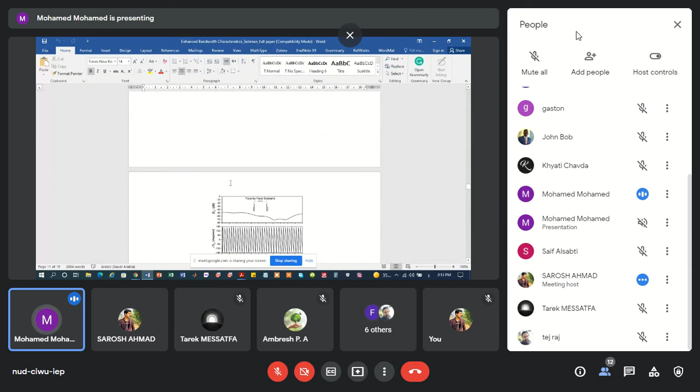And also I investigated more about the time domain because I am interested in the time domain. This is experimental work compared with the simulation result in the time domain, because it's part of the S parameter measurement, as a magnitude and as a phase. You can see the linearity of the phase. Also, I investigated the signal itself. I could estimate the group delay.

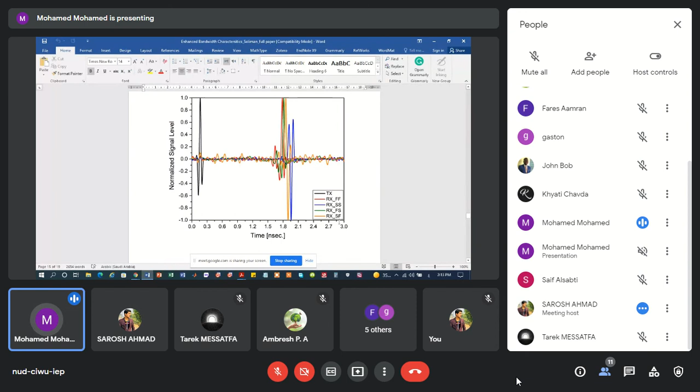After that, I measured the signal, also all by simulation, with transmitting and receiving antennas in different scenarios, face to face, side to face. It's 4 scenarios, as everybody knows. And after that, I investigated the normalized power spectral density because I want to mask it with the normal power spectral density for ultra wideband. And we can see it covers all the range of ultra wideband, till maybe 21 or 21.5.

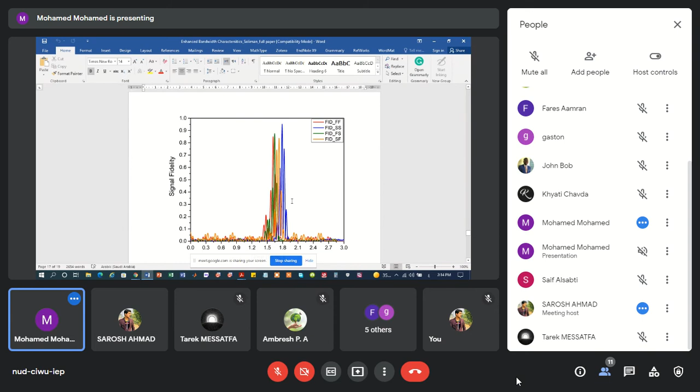And also I estimated the signal fidelity. The signal fidelity, as you can see, is high in the scenarios, almost all of them more than maybe 85, in all cases. This is one of our considered complete papers after the EUCAP conference. It was in London, 2018.

Did you publish this paper? This one we didn't publish, actually, because we faced a difficulty. EUCAP suggested us to submit it to the IET. When we started writing the paper, we found most of the data is already written in the conference paper. We faced a very big difficulty about plagiarism. This was one issue, even though we have new results. I quit working on it maybe 1 year ago, because of this reason.

Another thing, in the second year, of course, we have difficulty with the measurement and fabrication. This fabrication and measurement takes from me almost 3 to 5 months. Fabrication, yes, measurements do not take much time, but here it is very fast. For that we started working on another thing.

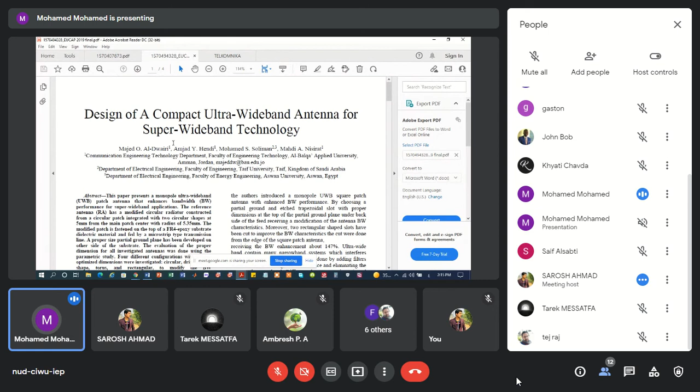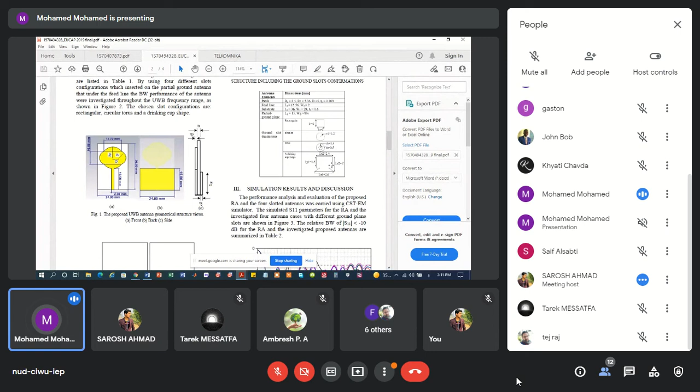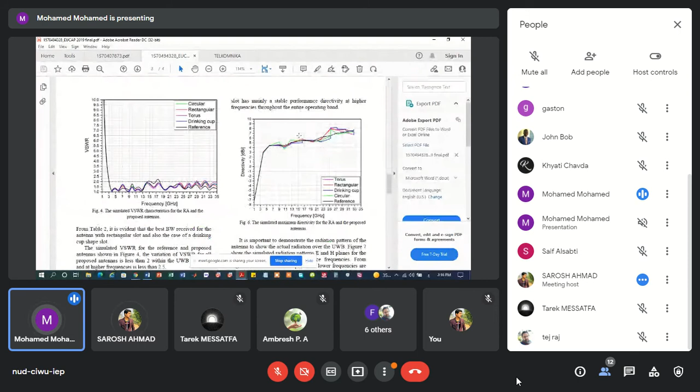Me and my colleague were thinking to modify the antenna shape, so we can have our own shape. For that, we submitted a paper to EUCAP the second year after that, and alhamdulillah, this paper was also accepted and presented. We have our own shape, and we cut the slot behind the feed in different scenarios, as you see, and we could get till maybe 35 gigahertz. We also investigated the directivity, the gain, and the radiation pattern.

But also the facility of the measurement and fabrication was difficult for us at this time. The year after that, maybe 2 years ago, we decided to end working on ultra-wideband, because we also published a paper in the same year in Springer, in Wireless Personal Communications. It was a good paper. Alhamdulillah, it took a long time for publication, submitting and revision.

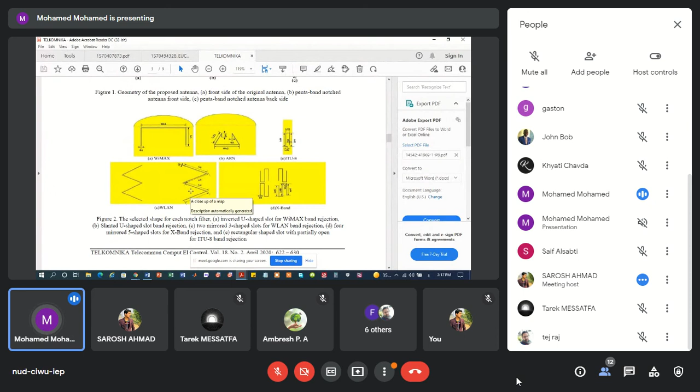For that, we tried to submit a paper to Telkomnika, this Scopus Indonesian journal. We tried to investigate another type of ultra-wideband antenna, and we tried to make some notches. Because we saw some people make maybe 3 or 4 notches, in this paper we made 5 notches. As you see, this is our own design.

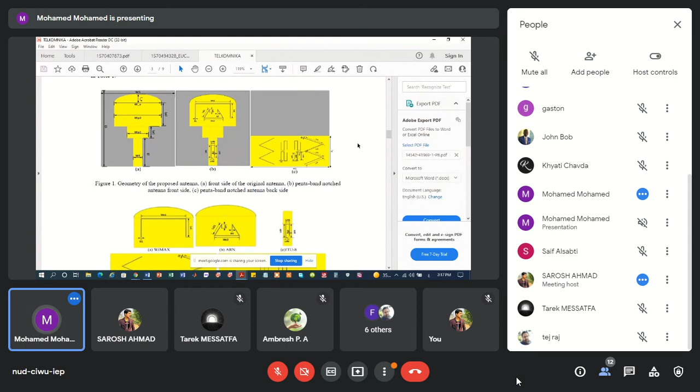Actually, we have a strategy in our design, and I totally agree with this strategy. If you design a simple shape with a small modification, you can control the optimization easily. This is one of our targets. Actually, it took us almost 3 weeks to optimize all these parameters, and all these routes in the partial ground.

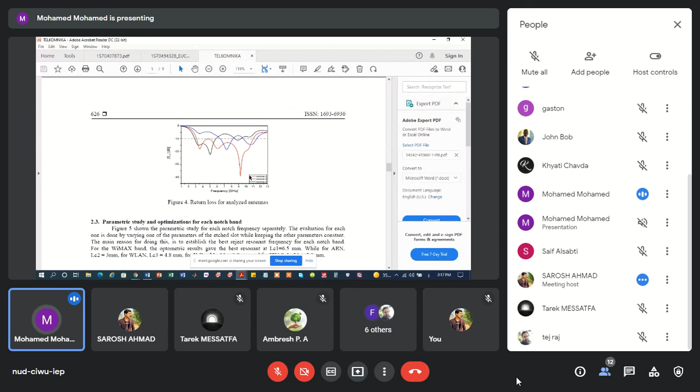We tried to use the equation, and also optimization, and we made a comparison of both of them. This is the evolution of the antenna design: the first design, second design, and the final design. These are the steps of the optimization for each one, and we could get this kind of 5 notches, as you see. Alhamdulillah, this was accepted in less than 1 month. In this paper we made a comparison with other work, and we concluded this in the discussion and the conclusion.

This is maybe considered our last work in ultra-wideband. But I started working on ultra-wideband again some months ago, and I made a design. The main purpose of this design is not ultra-wideband, it is for a MIMO antenna. I will show you the result, because I am still writing this paper, so I will show you only the result, not the shape of the antenna. And we can discuss if you have an idea.

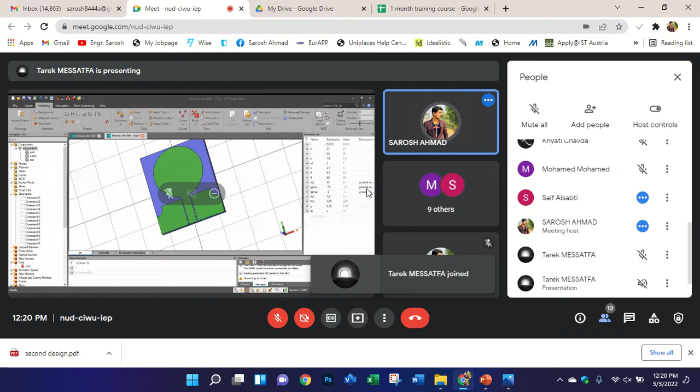Okay, Tarek, before presenting your screen, you should ask me, because maybe some other people want to present. What? I can't hear you. Wait a minute. Now you can hear me? Yes. I mean, before presenting your screen, you should ask whether you should present or not. I was asking Saif first, then I will ask you. Dear Saif, do you want to say anything?

Yes, I did a MIMO design. I will show it and some results. It starts from narrowband and ends with ultra-wideband. Okay, show me your screen. I will show.

It's sharing now. Not yet. I think the share button is not activated, I don't know why. Maybe it will take some time, as Mohamed did. Brother, you have a share screen button on the left side. You can push it and after that you can share. Yes, now it's okay. So, do you see my design now? I am watching your screen, not your design. You open the CST. Just a minute. I will share another option. Now sharing? Yes.

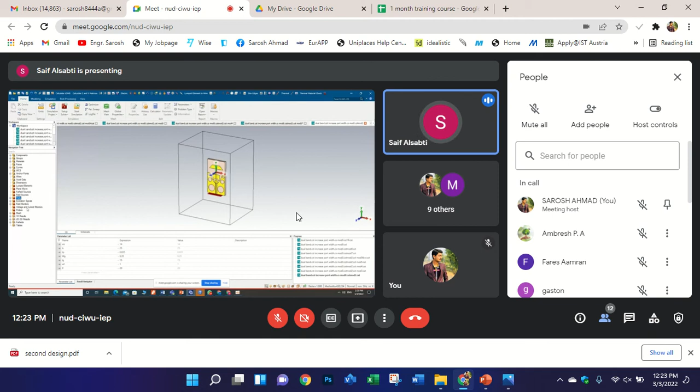I got multiple simulations for multiple designs. So I started with the first design, and I got this result here. So here is the wideband, as you see, but I need to shift the frequency. Maybe the component or the antenna can be scaled up to decrease the frequency, shifting it. This is the main idea.

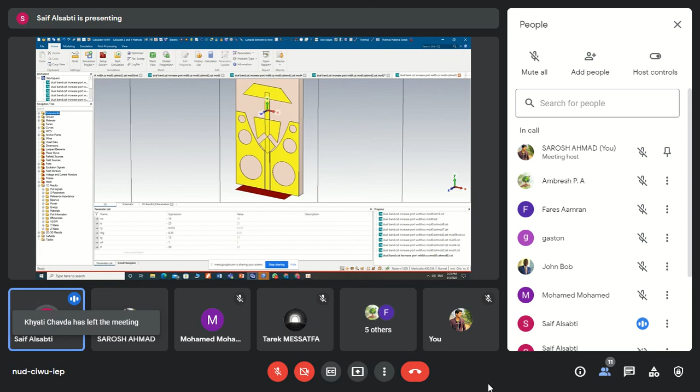And for this design, I will show this. I think yesterday you showed us the same design, right? Yes, but I modified something about it. I modified it by cutting here. If you see, I got a wider band. This is the first option, and with the second option I also get a wide band and increase it more by changing something.

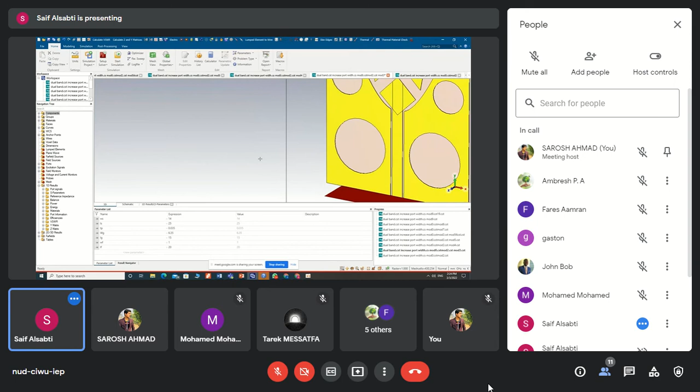I changed the size for that. Maybe it's very near, not a big difference. So another option, I put a hat here to see, and I got new results. So I get more wideband and a frequency shift, because if you remember, it started from 4, now it's 3.5. After that, I did another simulation here. Not much, but the band at 7 disappears.

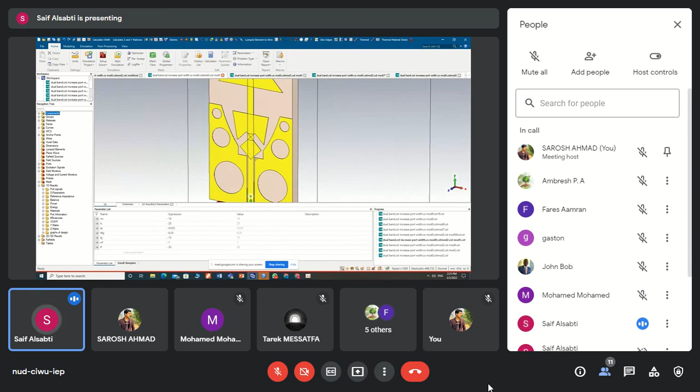I cut from here and this side to increase the band and shift. After studying the surface current, I cut it from there, and also made some change here to remove the upper part of the CPW. After that, I tried many times. And here I made some frequency shifting. I cut it from there and there, and got a new result.

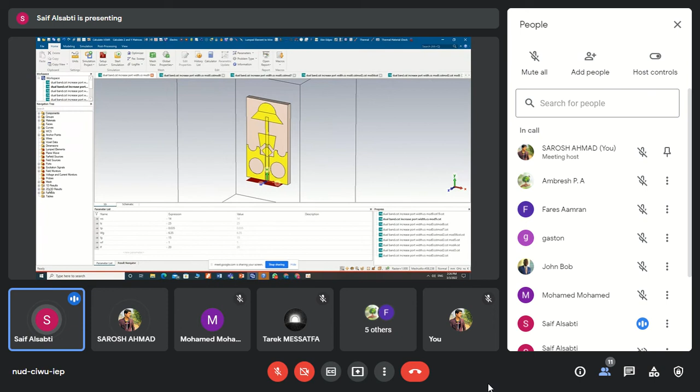So the total result, I want to see something here. This one. Yes, that one. Also, I cut the half circle here and got a new result. So I will see all the designs here. Which one is recommended to fix it and shift the frequency? So I got many results here and saved the graphs of the designs.

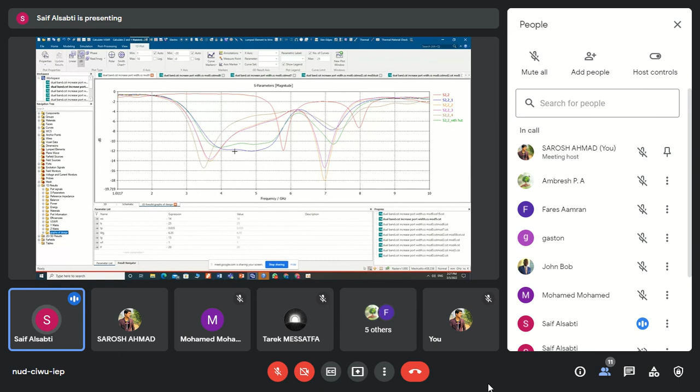Yes, if you look at both wideband results you have achieved, the return loss is not very good, because it should be less than minus 15 dB. In all of the cases, you have very low return loss. I mean it should be deeper, in the downward direction. Maybe up to 40 or more than 40. It should be in the range minus 25 to minus 40. It is okay.

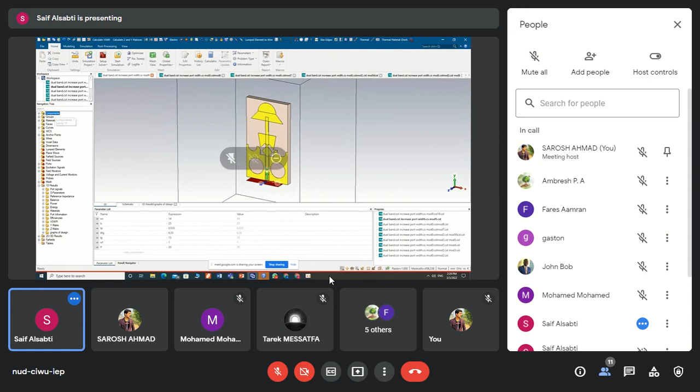Yes, maybe enhancement by using some enhancement surface material or metamaterial. Yes, we can try with metamaterial, but first you need to set the frequency. You can set the frequency at 3.5 gigahertz. Show me the design first. Which one? Maybe design 9 here. Yes, you can show any design. Press one button on your keyboard. Press 1. Yes.

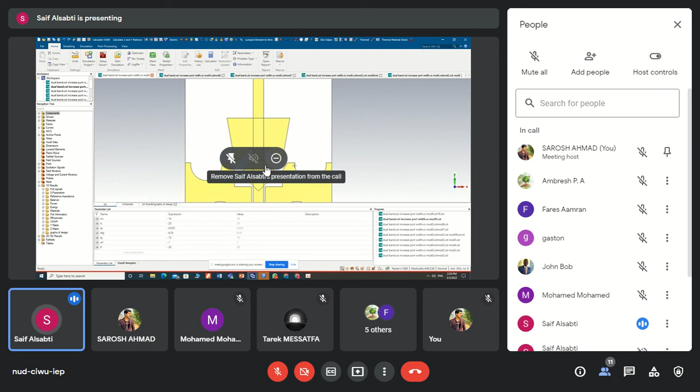Zoom it, and you should know the reason for your circular slots inside the CPW. You should notice the change. If there is no change in the frequency band, there is no need to add circular slots in the CPW. So I remove it, because it doesn't have a big effect on the antenna design. Okay, show me the first design with the complete CPW.

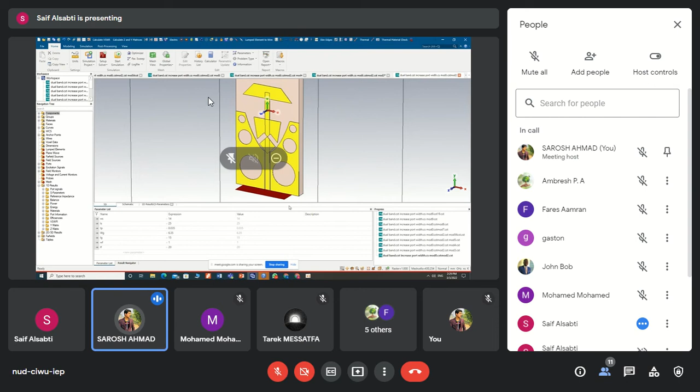I want to take a snip and share my screen. Just zoom it so that I can take a snip. And keep your design near the toolbar, on the left side. I mean, shift your design to the left side. Like this? It's okay. Let me share my screen, I want to share some suggestions with you. Can you see my screen? Just a minute. Yes, now it's okay.

So you have this design. First you need to know the difference in the results from adding these slots. If there is no change in the S11, then no need to add these slots. Yes, I will remove it because not a big change. Okay, I want to share more ideas, like you can modify your shape, because at this moment your design results are not very good. So you can do some steps to get better results. Wait a minute.

Okay, suppose you have this design. Okay, this one. And you have this shape, this is your patch. Okay, the other thing, this CPW, you can use CPW in this way. You can make a sharp peak, like this, and then go to this like this. Okay, so this is your CPW. And also in the same way, this is your CPW.

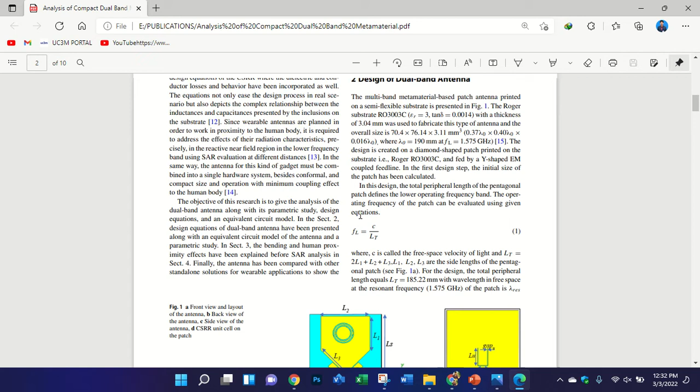Okay, now this is your feed line. What if you divide your feed line into two parts to achieve the novelty aspects? If you divide your feed line into two parts, one is here, like a Y shape. As I showed you in one of my papers, or maybe I will show again, this one is the same as this one. You can see the feed line is a Y shape feed line. So you can make a Y shape feed line.

But you need to connect a patch in that way. Remove this one, this patch. Okay, so you have a... you can make any shape here, like Z shape or S shape. You will get a dual band antenna. Okay, this is your first resonator. Or it can be like this.

So here it increases the length, increases the wavelength to reduce the shifting frequency, right? Yes, you can make a resonator like this. I think so. Also, I used the feed line here. The total feed line I think is 25, maybe not 30. So this is the reason for the high frequency. Not very high frequency, but acceptable.

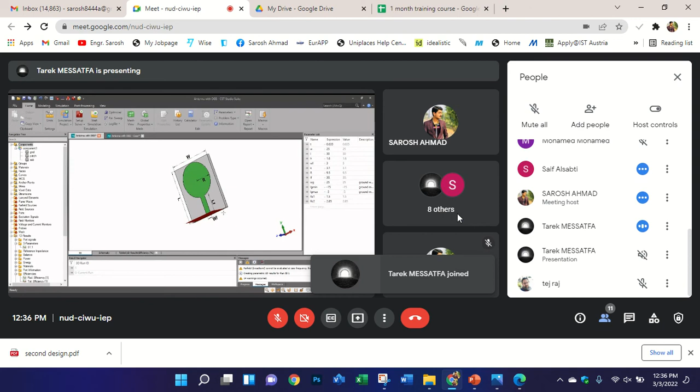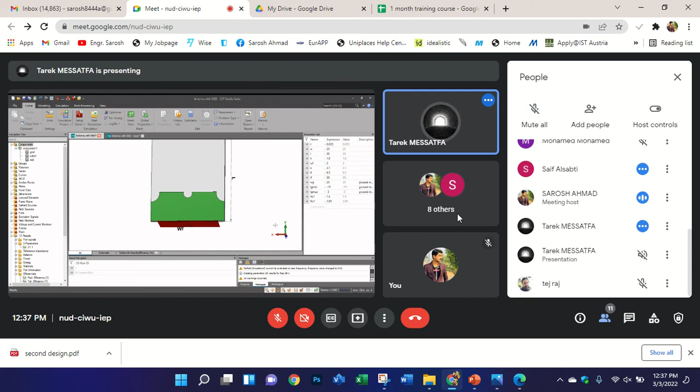Okay. At first, I made this design. I made circular shapes as a patch, and then I made a partial ground, and then I made a semicircle here behind the feed line. And I saw the result. I got some band above minus 10 dB. So I made quarter circles here at the edges of the ground, and I optimized the result, and I got a perfect result. You can see my S11. Yes, I can see your S11.

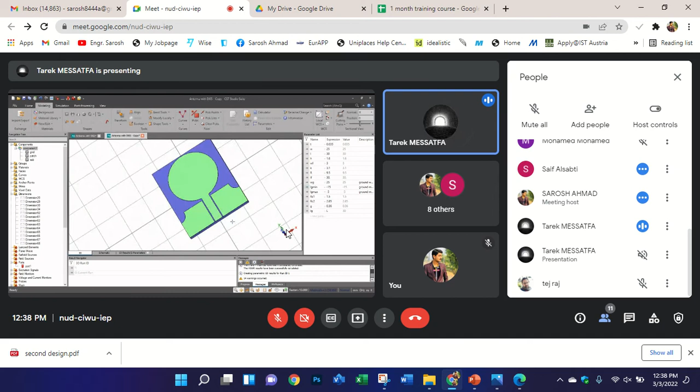But the problem is that there are a lot of circular patch antennas already published in the research. So we need to find the novelty factor, a new shape or new design. Yes, but this work is actually from 4 years ago, in my master's degree. Okay. And yesterday I tried to make this ground a coplanar waveguide and see the result. I get from 2.77 to 17 gigahertz. Yes, this is UWB, because it behaves like a UWB antenna.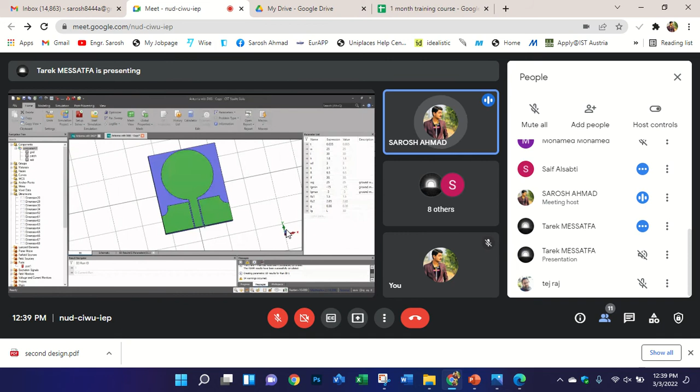But there is no shape, I mean, no good shape. Let me share my screen. I will give you some suggestions. Did I give you any suggestion on the previous designs you showed me? No, actually I didn't, because I was busy yesterday. Okay. I mean, I have given you. Yes.

Okay, Mr. Ahmad. Yes. For this work, what is the problem? We can't make optimizations or slots or any idea. Yes, I am going to share one of my designs that is circular, but you can see the design.

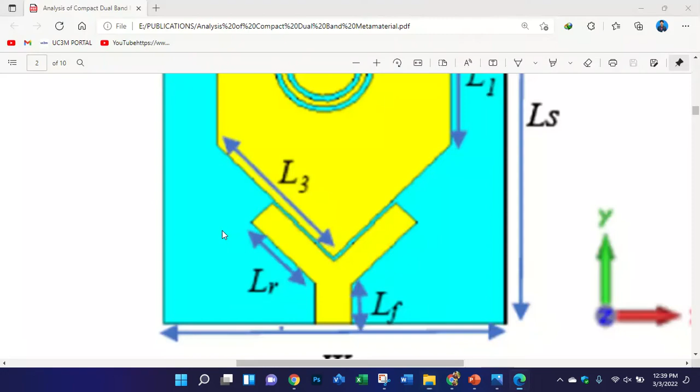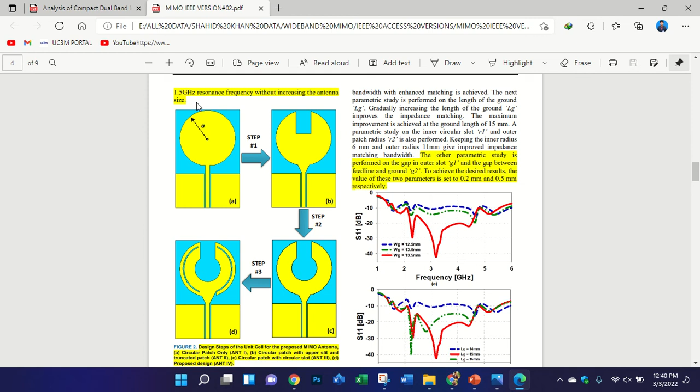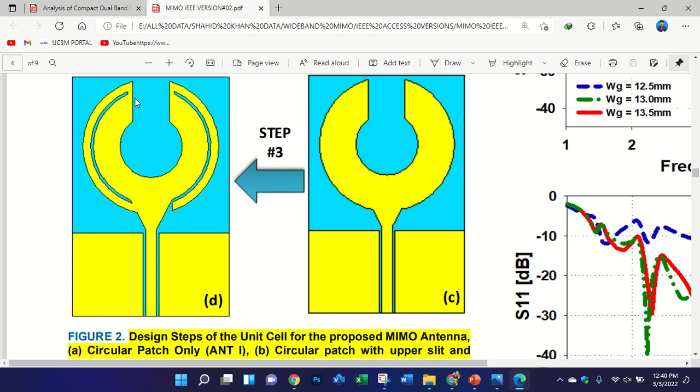Because this is a very simple design. You can see I made a simple one, I used this, this is already published. Then I made this slot, then I created this slot, and then made this final design, the left one. In this way you can modify the shape to achieve more bandwidth.

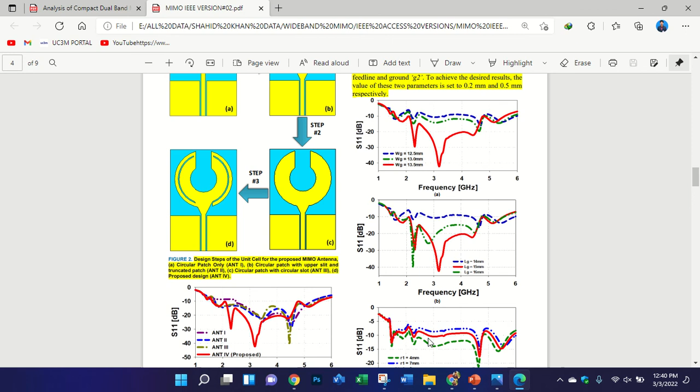It can be 2 to 5 gigahertz bandwidth, or it can be UWB, depends. So in this way you can make your patch different. Don't make a plain circular patch, just modify the shape so that nobody can say you have followed any paper and made the same thing. Because simple circular patch antennas are published a lot.

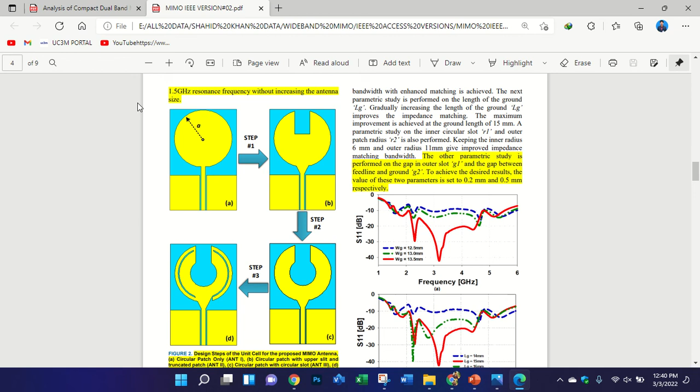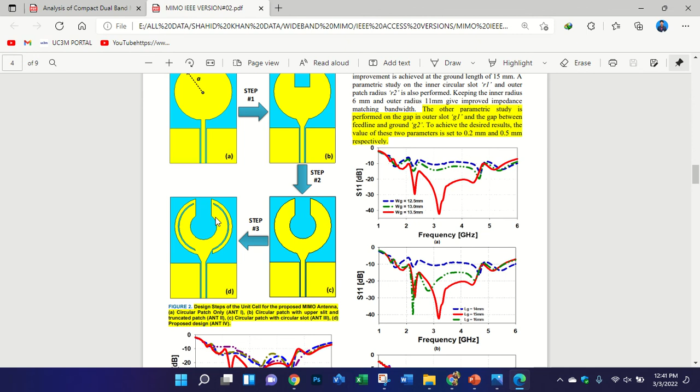So that's why I want you to make some changes in the CPW or make a different shape in the circular patch. Yes, actually I made a circular patch because it's my first design in CST. I didn't know many shapes. If you don't know any shape, you can even search the internet for different shapes. I didn't know shapes. Actually, I did circular shapes randomly.

Yes, it is random, but you can make slots. Suppose you have a substrate. This is your substrate and this is your patch, a circular patch, and you can make some slots or a different shape. First, in order to design, you need to keep in mind what you want to do. Like you have a simple patch like this.

So how can you modify the shape? What if you create a triangle in the middle of this patch, like this. But I think in this case I will not get super wideband. It's not necessary that you make a wideband, but the most important is the novelty factor, the frequency band you achieve, and how the results are.

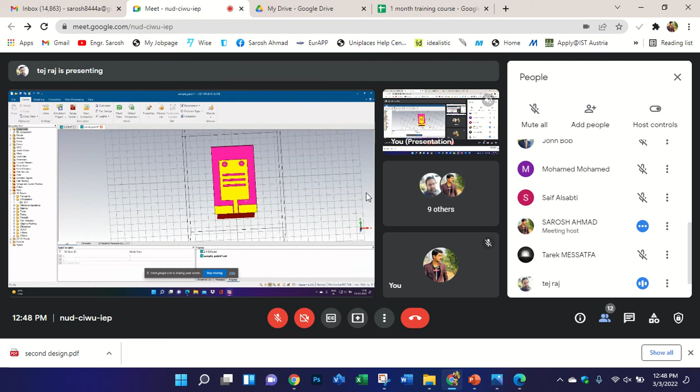Actually, you told me to go with the partial ground. I have designed the partial ground as well as this ring structure over here, but there is no effect on the S11 parameter. Then I again optimized this CPW ground plane according to its length, but still I am getting the same thing. It will be resonating after 7 gigahertz, I think.

I didn't get a proper result in this case. Okay, show me the impedance. Impedance will be 50 ohm. Okay, now show me the design. Yeah, this one, show me the back view. Is there anything on the back view?

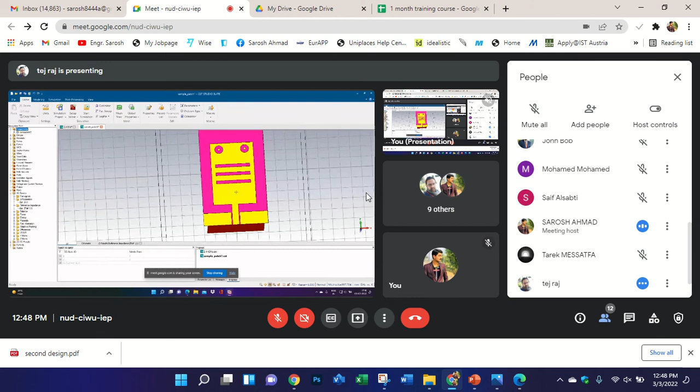First thing, why are you using two ground planes in the design? Actually, earlier I just did the partial ground and then checked the results, but still the same issue is there. Yes, you can use the partial ground, but not near the port.

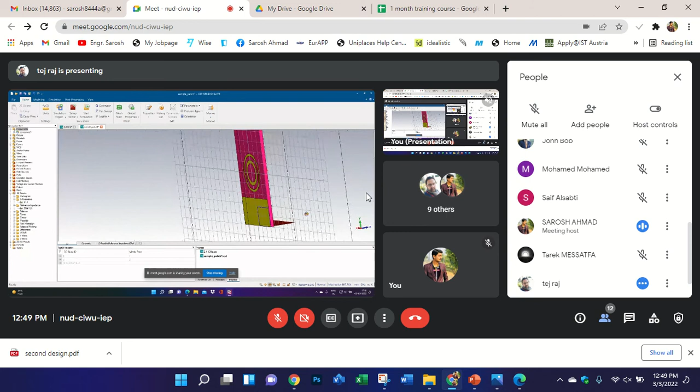You see, in the back view and in the front view you have the ground plane. It means on the front view you also have a ground, and on the back view you also have a ground. So if you want to make a defective ground on the other side of the substrate, then you don't need to make a ground near the port. You can make it upper side or mid side of the port. That's why it is not working properly.

Okay, you are using dual ground. What should I do to just shift the frequency band to lower frequencies? What can I do? Actually, I have also optimized the length of the patch from 27mm to 33, 34mm, but still getting the same thing, not a proper result actually.

Yes, when you use CPW, your CPW ground controls your frequency band, while your patch helps you achieve your desired radiation pattern. So in this case your frequency depends on the length of the CPW. If you increase or decrease the length of the ground, your frequency will vary. Also, you can try with less width of the feed line.

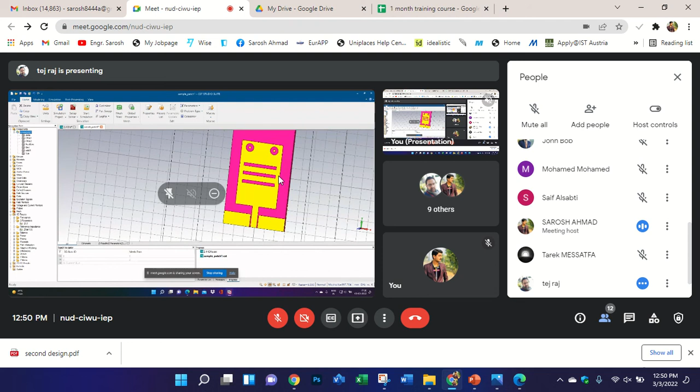Okay, that's good. Yes, and also try to make another new shape, because you can see this is a rectangular shape patch, you just added a horizontal slot.

So you can modify some edges, like you make a triangular or circular slot on the edges, to cut at the four edges of this patch. And you can also make a vertical slot in the mid of the patch, as you have designed the horizontal slot. But if you create a vertical slot, maybe it will work as a multi-band antenna.

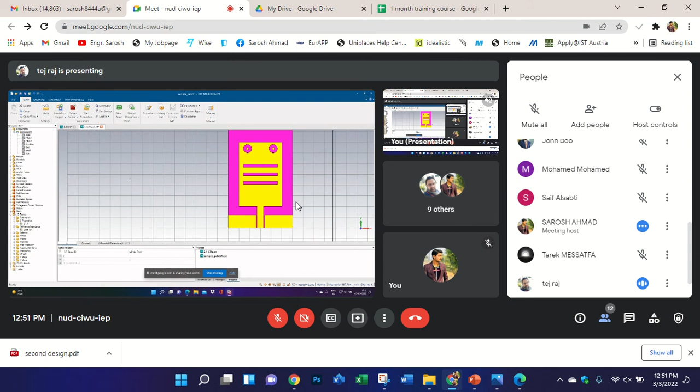One more thing, I have made a very simple patch actually. If any kind of suggestions you can give me to make it multi-band or wide band, this structure I just followed from the equations I got from the EM Talk website.

I've just designed this, and according to this, I'm getting this S11 parameter. I have given a frequency range from 1 to 12. Because in earlier design, I gave 1 to 6 and it resonated after 6, so that's why I've already taken a frequency from 1 to 12 gigahertz.

So is there any possibility to do something in this inset-fed patch to get something different?

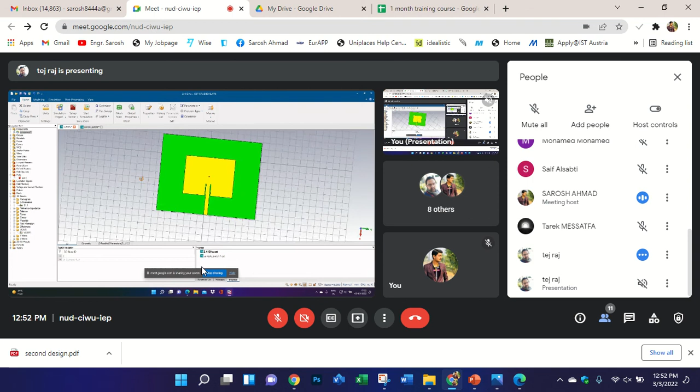So for that, first, before designing the antenna, you need to keep any shape in your mind, or you can check on a website. Even if you don't know the shape, you can go to a graphic designing website and you will see so many shapes there, and you can try to make a new one.

Graphic design, sir, any name you can suggest? Even on Google, if you write it, if you know how to cut the patch, how to create and cut the patch.

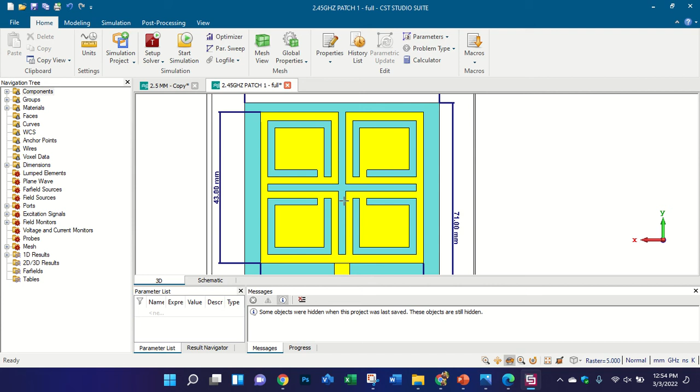So this is also a good shape. You can make a shape like this. There are 4 resonators, so this antenna will work at 4 different frequency bands.

So you can see here, you can create a shape of the patch like this. You can see there are 4 patches here. This is your resonator 1, this is resonator 2, this is resonator 3, and this is resonator 4. It means this antenna will work at 4 different frequency bands.

But not like 1 gigahertz, then 2 gigahertz, then 3 gigahertz. Maybe it will work at 1 gigahertz, then maybe at 5 gigahertz, or maybe at 3.5 gigahertz. It depends. So you can use the CPW technique.

And make a shape like this. Can you create a shape like this or not? Yeah, yes sir, yes sir.

In the first step, what you need to do is create just a simple patch. You need to create a patch like this. I made a simple patch like this. And then you need to create a plus slot. This is your plus slot, plus-shaped slot. This is slot and this is your slot.

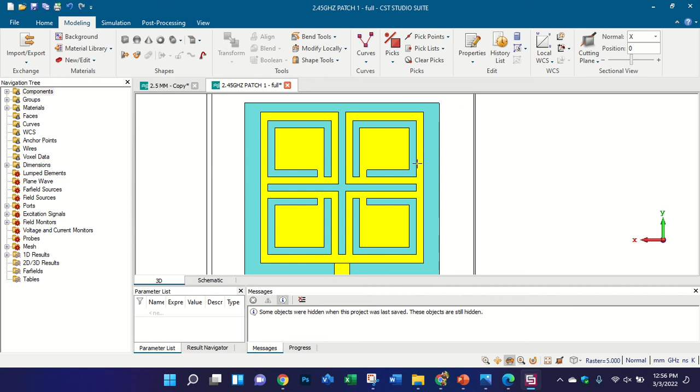Try this shape, maybe it will help you achieve something, because this antenna, I just set the range 2.2 to 3 gigahertz, and it is operating at 2.45 gigahertz. If you like to work on this design, the size of this design is very big, so I want you to reduce the size, and this design will be publishable.

So with this CPW you can control the frequency band.

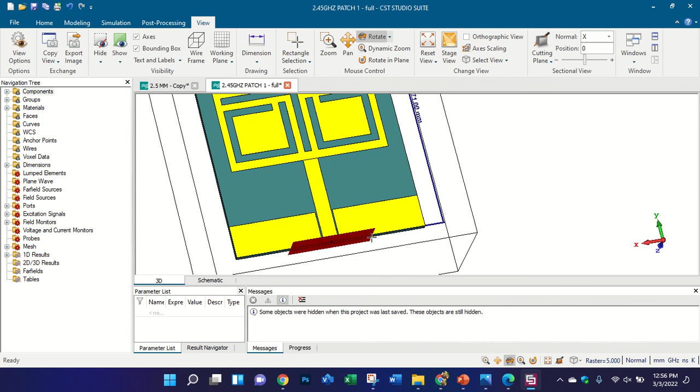I have another idea in my mind, you can also do one more thing. Let me share.

Suppose this is your design, and if you rotate this one like this.

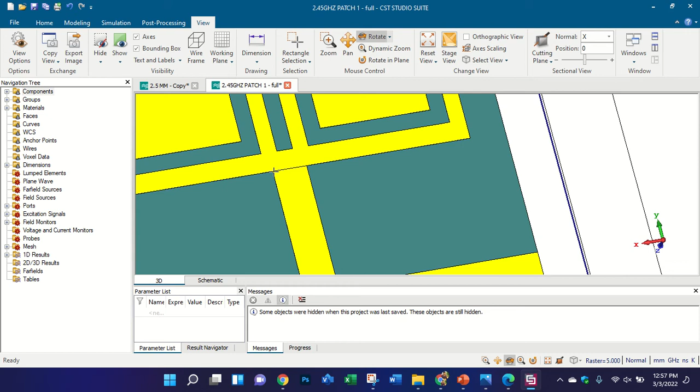Now, when you are connecting the feed line, at this point you see both patches are connected with a single feed line. So if you make a U-shaped feed line like this.

Suppose you have a patch like this, and you can create a feed line here, a very small feed line. Then you can make a U shape on the feed line to cut or divide the feed line, to connect this patch.

I want like this, so it will become a novel design, a new design, very good design. Yes sir, I will try for tomorrow, I will show definitely. And also it looks very good design, and you can work on it.

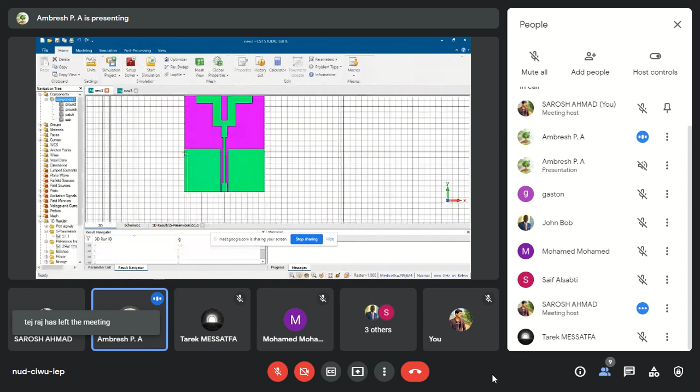And when I decreased it still more, like 5 mm, 9 mm, 7 mm, and 7.5 mm for length of the ground plane, I could get the dual band characteristics. For ground plane length equal to 5, I got a single band, which is this green portion, this green portion.

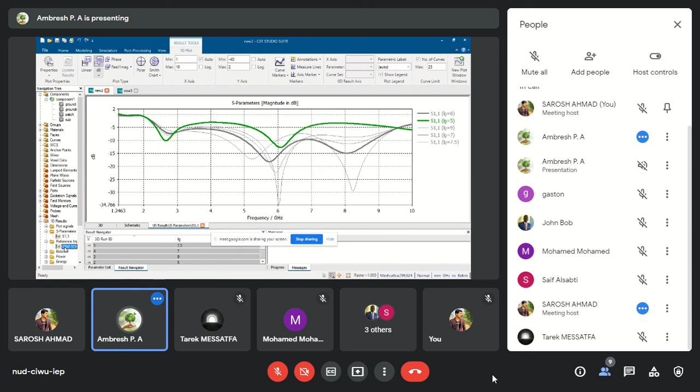And for other lengths of ground plane, equal to 9, 7, and 7.5, I got a dual band. So this is the design, sir. The reference impedance is 50 ohm. Okay, show me the design and leave the other results, because even that one is not working well, but the design looks nice, so we need to make this design operational.

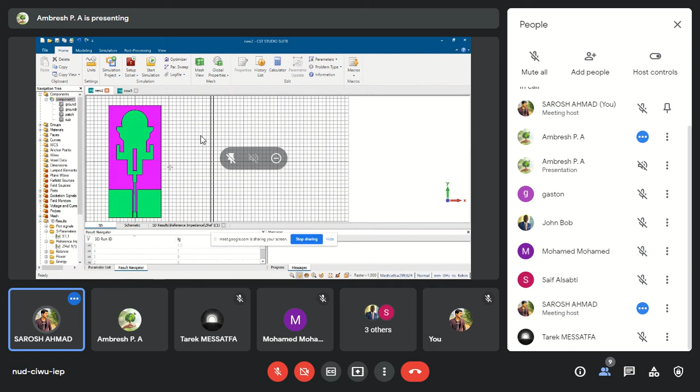Okay, so I'll give you some suggestions for that. You can work on it. Keep your design to the side, move your design to the left side, so that I can take a picture. What is the length and width of this design, and which substrate have you used? FR4 with 1.6 mm thickness. Like the paper I showed you the first time, the length and the width have the same dimensions.

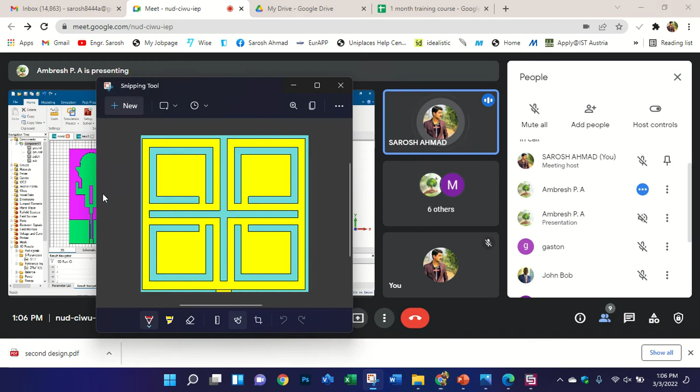Okay. Let me take a snip tool so that I can give you some suggestions. Wait a minute. This design is good, and I suggest you keep this design saved and work on it, to make it operational and to find the novelty factor. So how can we improve this design? I am sharing my screen.

So shall I stop sharing the screen, sir? No worry, you can, if you can see my screen. Can you see my screen? No, I'm not able to. Okay, you can stop sharing. Yes, sir, now it is visible.

Okay, so this is your design, and this is a simple CPW-fed monopole antenna. You need to do the following things to make this antenna operational. First, the S11 is affected by this CPW. If you increase the width of this one, on the upper side, then it will affect your frequency, because here you can see it is at a far distance from this feed line.

So the other main thing is that you increase the feed line like this. So if you increase or decrease it, check this one. Do a simulation and check the results, what the effect is on the S11. And this shape is good. Also try with the other one.

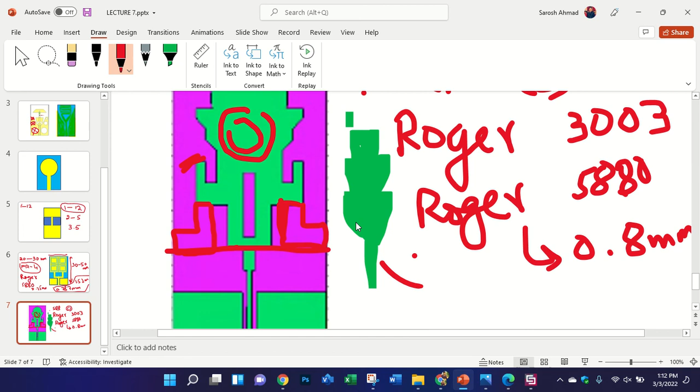Or you can also do one more thing if you want. Maybe you can increase this length, in some way, like this is just like parasitic elements, equal in length to this design, here. You need to do some optimizations.

If you do not notice any change in the results, then remove this CPW and use a partial ground plane behind the substrate. You should use a ground plane like this, on the back side of the antenna.

Okay, do the simulation and show me the results when you do. Okay, or the other thing is that I have one more suggestion, a good suggestion in terms of novelty aspects. You can do it this way: you can remove this one, and extend it in the downward direction. Okay,

extend this in the downward direction, and create another microstrip that connects the feed line. Okay, and also here like this. You will have three, like your feed line is dividing into three parts. The first part is connecting this patch, the second part is connecting here, and the third part is connecting here. Okay, try this in your design.

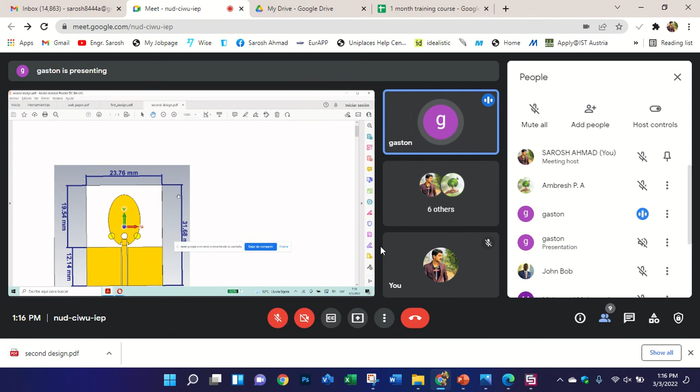Okay. And this is my design. It's not possible to show it in CST because I don't have CST on this computer, but I saved my design in a PDF. This is the shape. I used the same dimensions as your paper: the size, the length, the width, and the thickness. First step, I put the ellipse patch.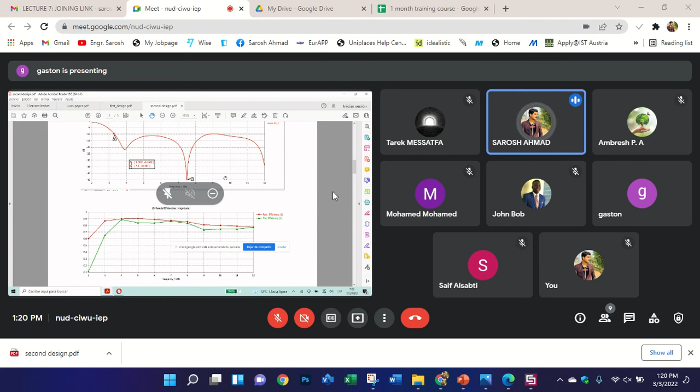Okay, so show me your design and I will give you some suggestions, because this design is very simple, and with this simple design we cannot target a good journal, but I'll give you some suggestions to make some changes so that maybe it will become a good design. Okay, show me the structure of your design. Did you try another design or only this?

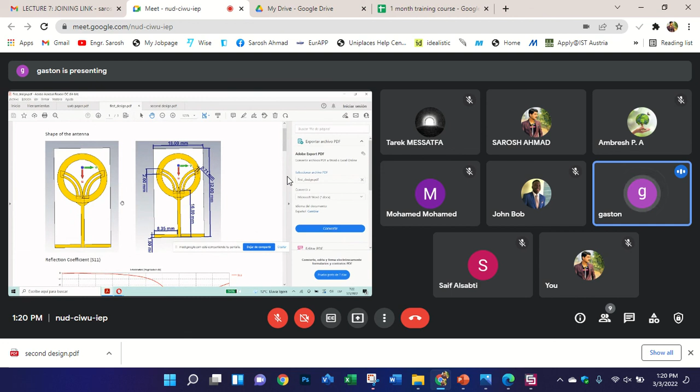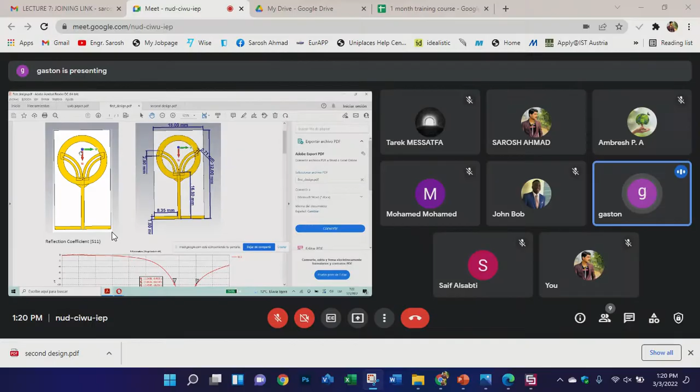Oh yes. This is my first design, for 2.45 gigahertz. The size of dimensions. The first step, I created a circular patch. Second step, I cut it to form a ring. And later, I put these semi arcs on the left and the right side. And this is my result of reflection coefficient.

It is working at 2.45, minus 16 dB, and these are the other graphs: the efficiency, VSWR, the gain, the radiation, and the surface current. And I don't know if it is possible to improve this shape to improve the results.

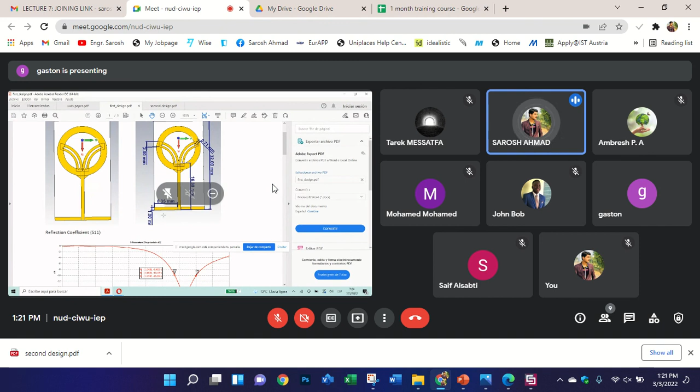Okay, show me your first design, the one you showed me. This? Yes. Okay, let me take a snip tool and I will give you some suggestions on both your designs. Your second design looks somewhat new, and maybe we can work on it. Let me share my screen, watch my screen. You can stop sharing. Okay.

Okay, so you have two designs. Okay, this is your first design. Okay, and you need to vary this length of this CPW ground to check the bandwidth. Okay, and the other thing, you can create another patch, like this on this top side. Okay, half patch, and check what is the change in the results.

Okay, and you can cut from this side. Like you can cut from this side, and also this side, and check what is the difference in the results. Okay, this is my first suggestion for this design. You can publish a conference paper on this design. And for this design we can target a journal if you do some modification and achieve better results.

Okay, the first one, if you notice, it doesn't have much novelty. I mean, you see there is a very small length of this ground plane. So what you can do, you can use CPW. Like this. This is my second suggestion for this design. You can try this one. Or if there is no change in the result, then you can remove this CPW and use the partial or full ground plane, or you can use a ground plane like this on the back side of the antenna.

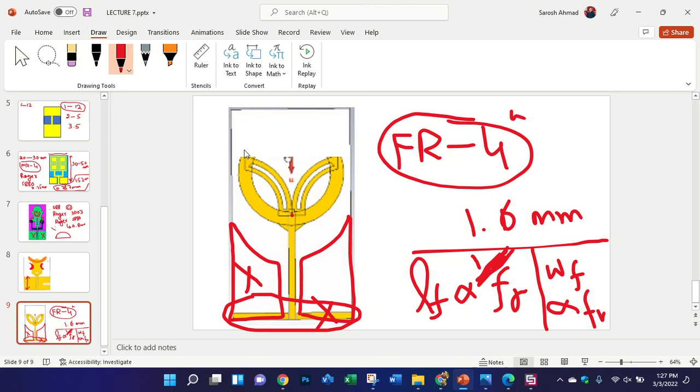Also, you can do one more thing. You can remove this one and create a bigger patch like this, as you have designed this. Like you make it like this, here, here. And with some more changes in the results, it will become a multi-band antenna, like a leaf shape patch antenna. Like this. You have a patch, and you just do like this. So try this one. You can copy this one, this one, and paste above.

Do you understand what I mean? Yes. Okay, maybe it will help you more. If you copy this one, just copy this one and paste above. Make a copy and paste above, and also on the other side. Then you work on it and show me the results when you do. Okay. Thank you.

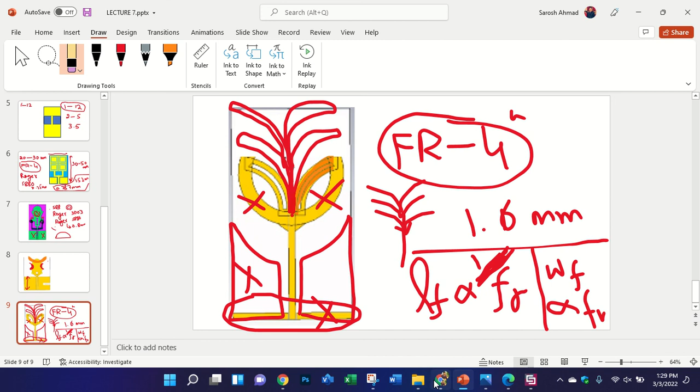Does anybody want to show anything? Dear John, did you do anything? Yes. Okay, show me the design if you want to share screen. Share your screen, please. There is a distortion from your side, and we are not able to see your screen. You are opening your laptop? Okay.